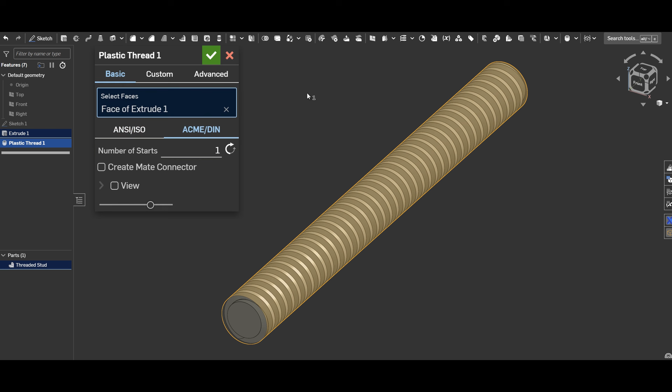You can also change the number of starts or reverse thread direction to fit any project you're working on. Adding a mate connector makes creating assemblies a breeze. The Basic tab creates threads with a predetermined pitch designed for easy and strong printing on many 3D printers. Each tab in the feature script expands on the previous.

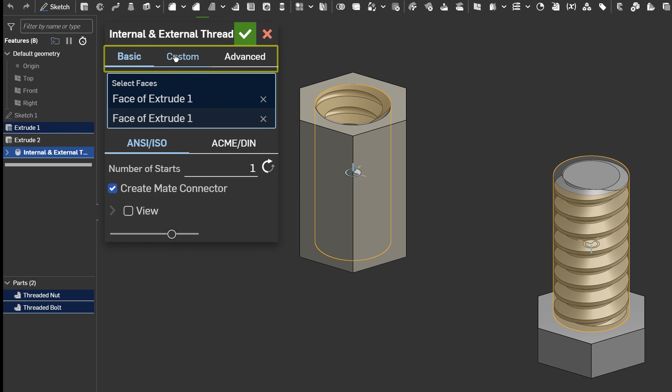If you would like more control over the threads, head to the Custom tab, where you can adjust the thread's pitch or TPI and thread length. You also have access to different tolerances for internal threads, meaning you can fine-tune the tolerance of the threads to fit any printer or hardware you wish to use.

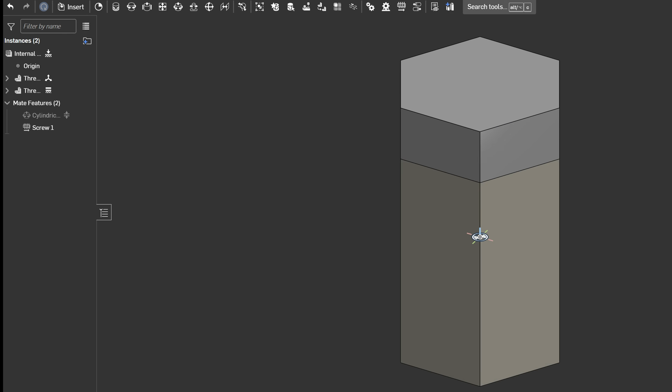When combined with the original options from the Basic tab, such as adding a mate connector, you can visualize the assembly before it is printed and make additional adjustments. Want to make internal threads that allow standard bolts to thread directly into the plastic without a metal insert? Create a hole the same size as the bolt and add threads with the custom pitch or TPI that match. Now you can thread a bolt directly into the part with no post-processing.

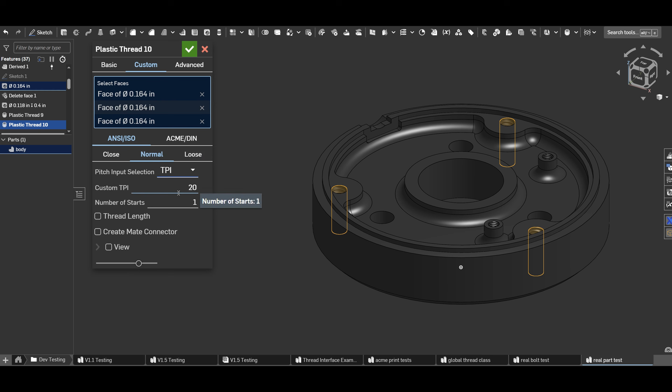In this example, two sets of holes are being threaded, one M3 x 0.5, the other 8-32. Using the Custom tab, the pitch and the TPI of these holes can be set and the tolerances will take care of themselves. And here's the result, a 3D printed part with threaded holes that require no post-processing. Whether you want to do a trial assembly or print a finished product, the features in the Custom tab can accommodate nearly every project.

For users who want to experiment or get into the nitty-gritty of their threads, the Advanced tab gives access to several more detailed features. Use a manipulator to rotate the threads with respect to the part. This can be useful to ensure a specific orientation of two threaded parts when printed.

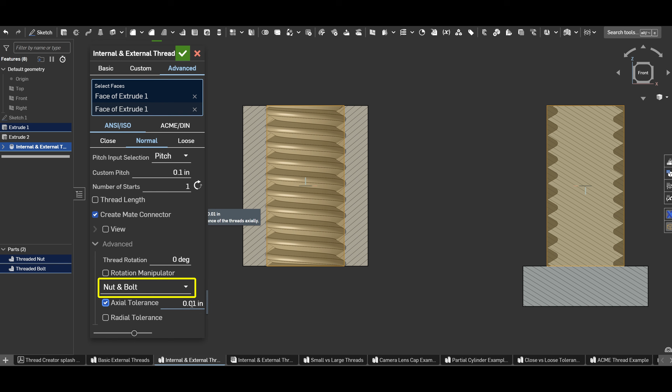Beyond rotating threads, you can also select how the tolerances are applied. By default, this is set to nut and bolt, meaning both internal and external threads have tolerance applied. This ensures your threads interface with any hardware you use. To customize the tolerance even more, add a custom axial or radial tolerance to increase or decrease the backlash, allowing for tighter or looser threads. This option allows for fine-tuning the tolerance to reduce or remove the need for post-processing.

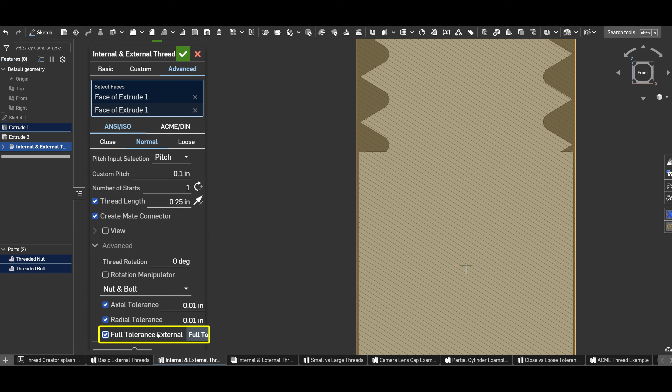You can also apply the tolerance of a partially threaded stud or bolt to the shank, ensuring it fits into a matching hole. With the full feature set in the Advanced tab, any ANSI, ISO, and ACME DIN threads are possible. And with all the combinations of options, you can create threads that work for any project.

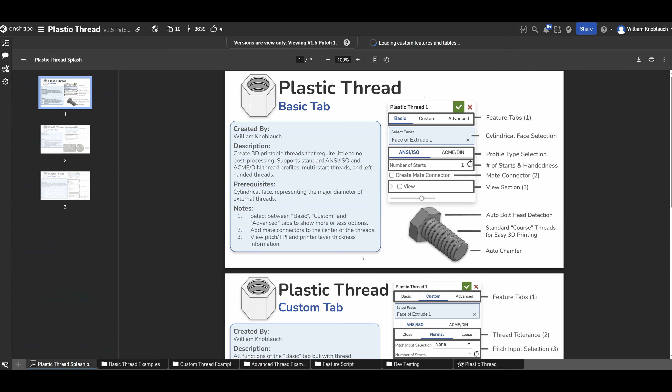To add this feature script to your Onshape toolbar, simply click the link in the description, sign in, and click the plus icon that says Custom Features at the top. Now you can use this feature anywhere in your part studios or documents.

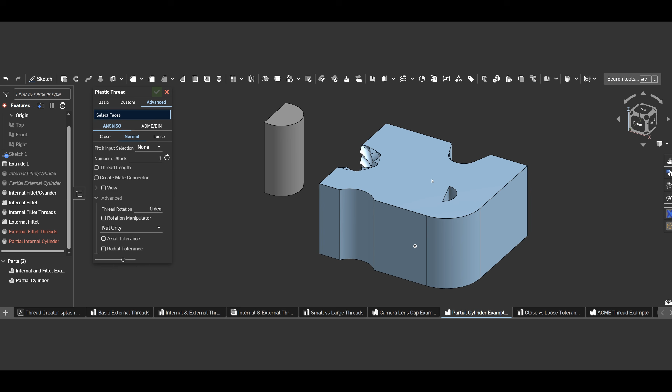Whether you want to add a simple plastic threaded joint to a part you're working on, or thread several holes for standard bolts, the Plastic Thread feature script gives you the flexibility to add accurate and tolerant threads to any project. There are even some extra functionalities that some might find useful, such as partial cylinders. In the future, more thread profiles will be added, including square and ball screw profiles.